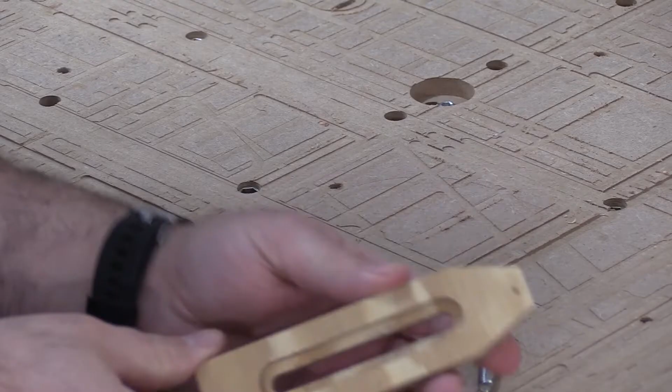So for a first project, I thought this would be good. I made a few of these early on when I got my CNC router table. I want to make a few changes to the design, so I thought this would be a perfect opportunity to do a full video. But what these are, it's just a simple hold down clamp for holding parts down onto the table when cutting, basically for holding plywood parts down primarily.

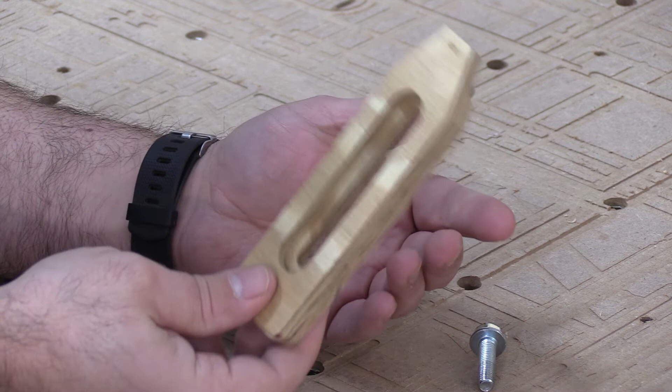It's simply made out of some 3/4 inch plywood, a slot in there that a bolt can fit in, and of course it's recessed so the head of the bolt fits down in it, makes it fairly low profile, reduces the chances of hitting that with the bit, so that hopefully you don't damage bits by hitting the bolt.

The advantage of making the part out of plywood is, of course, odds are you're gonna mess up. You're gonna put these in the path of the cutter occasionally, but since it's plywood, you shouldn't damage anything other than the part itself, and you can always make more.

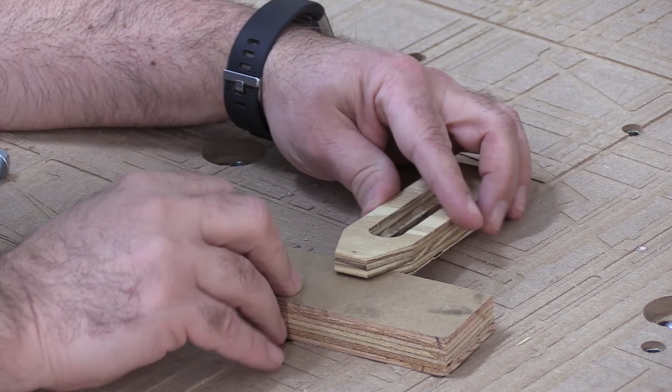So the way they work is, of course, you can bolt it down with the slot. There's a little bit of a notch underneath that can both hold down and push against the part that you're clamping down. So if we have just our stock that we're machining, the lip goes over it, and these are 8mm bolts. That's the size of the threaded inserts I have in my table. So you can get these as like 1/4 inch or 8mm. There's various sizes available.

That'll hold it so it'll keep it from coming up, of course. It does a really good job of keeping it from pushing back towards it. It doesn't do a great job, as you can see, you can pull it out from underneath. But what works well is if you have these on all 4 sides, it locks the piece in pretty well. So these are not overly complex.

However, part of the reason I chose these is because we need to do operations on both sides. We have the recess that's on this side, so obviously you need to cut with that facing upwards. But we also have this notch on the underside, so it does add the extra little trick of flipping the part over and making sure things line up. So I thought this would be a good getting started project. So let's go to the computer and I'll show you how we design this in Fusion 360.

So here we are in Fusion 360, ready to design our part. Now there's a couple things that I always like to do before I start drawing anything. So we're in a brand new untitled project. The first thing I do is I go ahead and save it. And so we'll call this hold down clamp. The reason you want to do that is once it's been saved once, Fusion 360 will auto save it from time to time. So if your computer crashes or power goes out, you don't lose everything.

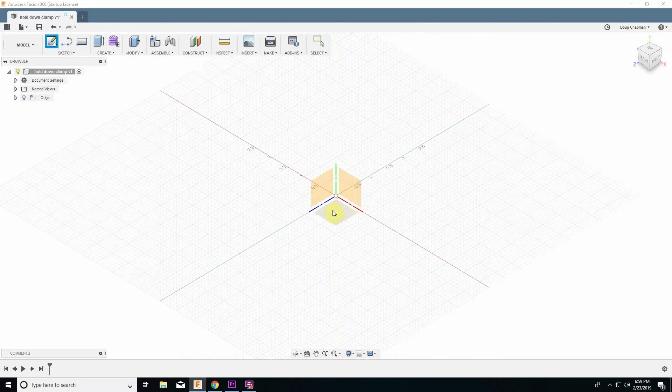And what it's asking now is what plane do we want this on. So we could have it on this plane, which is essentially the floor of this space, or on this plane, which is one wall, or this plane, another wall. It doesn't really matter at this point which one we put it on. So I'm just going to put it here on this plane, so we're looking at it from the top.

And we can start sketching here. So for the basic body, we'll just start with a simple rectangle. I'm going to do a 2-point rectangle, and just quickly make a rectangle, not even paying any attention to the size. So right now we've got just our rough rectangle.

We know we want the length to be that length parameter that we talked about, that we set in the user parameters. And for the width, let's say we want it to be 2 inches, so from here to here we want this to be 2 inches. So we need to do what's called a dimension.

I honestly don't even know where this is in the menus because it's something you use so often that I just always use the keyboard shortcut, which is D. So you press D on the keyboard, and you'll note the icon next to the mouse changed to a dimensioning symbol.

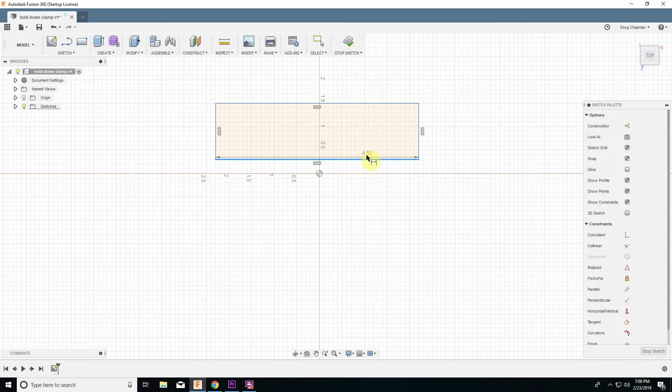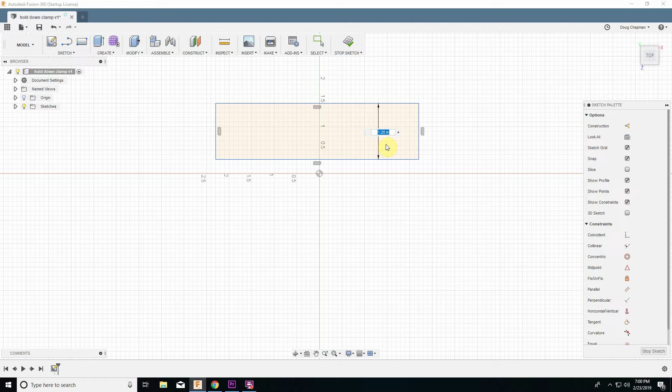And what we want is we want to set the dimension between this line and this line. So if we click on one of the lines, first it thinks we're trying to define the length of that line. But if, before we click anything else, we click on the other line, now it realizes we want to define the distance between these two. Right now it's 1.2 inches, just the random width I drew it to when I dragged the rectangle out. We want to set that to 2 inches.

Now from here to here we can do the same thing. We're still in dimension mode based on the icon next to the mouse, so let's click on this side and then this side. And on this we could just enter 6. However, we want to make use of that parameter we created so that later on, if we want to change this, we don't have to go into the diagram and change where we entered the parameter.

What we can do is actually enter that named parameter. So if we enter length here, you'll see that it sets it to 6 inches, but it's fx6, meaning it's a function, and the result of that function is 6. In this case it's a very simple function of just a single parameter, but later on we can change that parameter to update this. Now we want to round off these corners a little bit.

We don't want this to be just a simple block. Now, if you noticed in the diagram or the part I had earlier that I'd done before, I had rounded off the corners in the back and kind of created angles at the front. Now both of these things you could do after it was in 3D, once you've extruded this into a 3D part, or you can do it as part of the two-dimensional sketch.

So what I'm going to do is, to start with, I'm going to do this end of it in the 2D sketch, and we'll deal with the other end after we've extruded it to 3D, so you can see both methods. We just want some simple rounded corners here. The easiest way to do that is to just create a couple of circles.

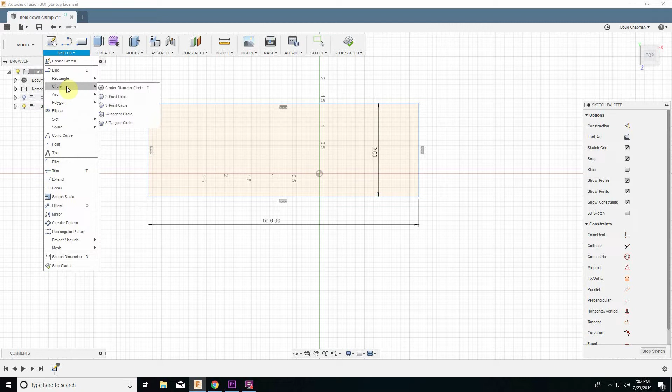So let's go up here, sketch, circle, center diameter circle. Right now I'm not going to pay too much attention to the exact size or where they are. I'm just going to draw a couple random circles. And let's say we want this curve here to be a 1/2 inch radius.

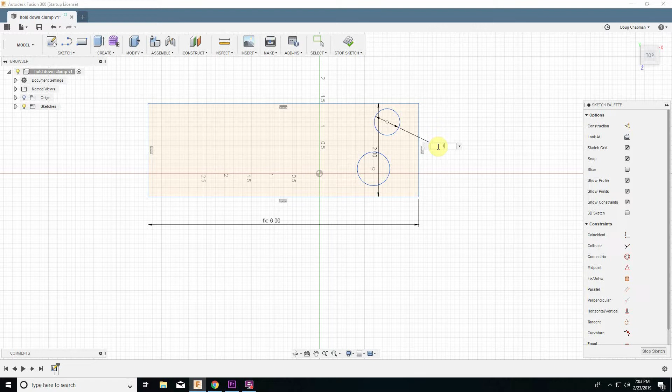So to define this circle, I'm going to go back into dimension mode by hitting D on the keyboard, clicking on this circle, and we want a 1/2 inch radius, which is a 1 inch diameter. So I'm going to enter 1 there, and I'm going to do the same thing on this one.

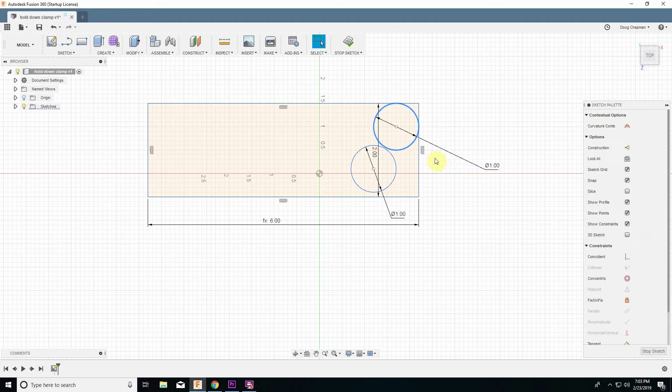So now I've got these curves the right size, but obviously not in the right location. Now you might be tempted to just select the circle and drag it to where it looks about right, and that may work, but it's not really the right way to do it. As you zoom way in here, on this one I got it pretty close, but you zoom all the way in, you see it's not actually right on that line.

It's just really close. So what we want to do is say this is exactly tangent to these two lines. Rather than just dragging, I'm going to drag this away to make it a little more obvious. The way you do that is you apply constraints.

Over here on our sketch menu, you see down here we have various constraints. First of all, let's make sure we don't have anything selected, so I hit escape. One of these constraints is a tangent constraint, so let's click on it.

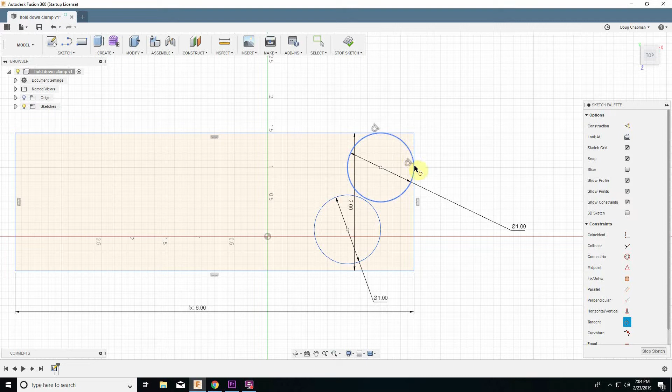Then when we click on the circle and then the line, you'll see that it added this little tangent constraint marker and lined it up so that it's touching this side. We can do the same thing up here, and now we know that this portion of the arc here is exactly the curve we want.

So let's do that on this one as well, make it tangent to both sides. And now we have our curve as we want it.

So now let's work on the slot that's going to go in the middle. We don't want the slot to go all the way to the end. We just want it to go, let's say, 3/4 of an inch from the end, from both ends. So let's say that we want to make sure the slot ends 3/4 inches short of each side. In order to do that, we really need something to line that up to.

So that is what we have, this concept of construction line. I'm going to create a line. Now I don't want an actual line, because a normal line would be part of the part. I just want a construction line, which is something you use just to help line up other features of the sketch. So in the sketch palette, we have this option called construction.

I'm going to select that, and now I'm just going to draw a line straight across here. I didn't pay any attention to how long it was, but it automatically did a perpendicular constraint here, and we'll talk more about perpendicular constraints a little bit later. This line is tied to both endpoints on these opposite sides of the part, and it is perpendicular, but it's just a random width from the end.

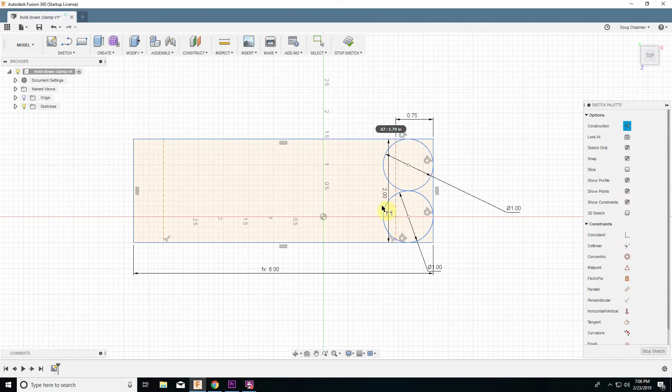Now, this is getting a little cluttered with these circles and these lines all kind of overlapping here. All we really care about for these circles is this portion of the arc that cuts off this corner. So what we can do is we can trim out some of this. And this is another one that you use often enough that it's easy to remember. The keyboard shortcut for trim is just T.

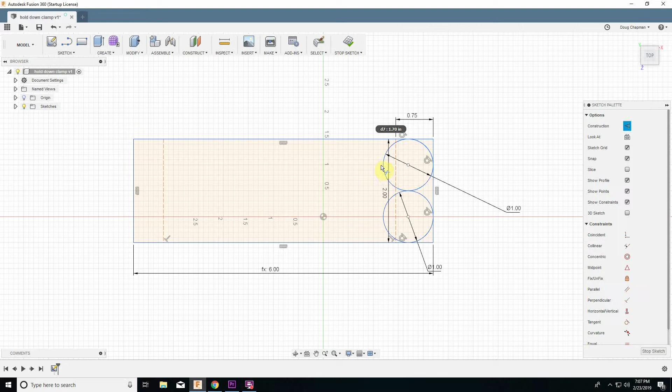Change the icon next to the mouse again. And we can click on this, and what it does is, see how it turns it red. Any place this arc intersects some other line, it assumes that's what you want to trim. So right there, it's trimming everything up until it intersects.

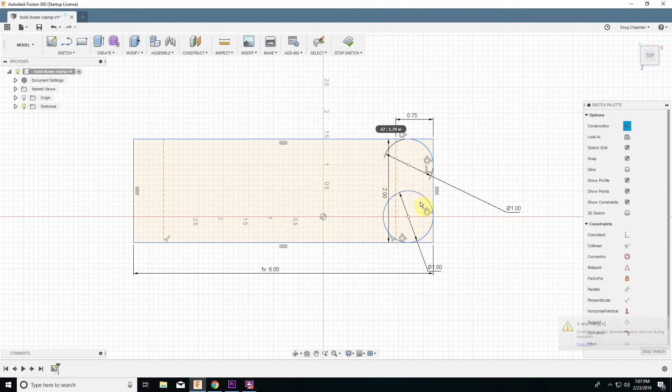So we're going to get rid of all the bits that we don't care about. Now it looks like there's more of the arc, but this is actually just part of the dimension notation, showing that this would be the diameter of an arc if there was still an arc there. But we've cleaned up a lot of that.

Now I'm going to go back into dimension mode and set this one to be 3/4 of an inch from this side. So now we know we want the slot from here to here. We also need to know exactly what is the midpoint, since we want our slot directly in the middle.

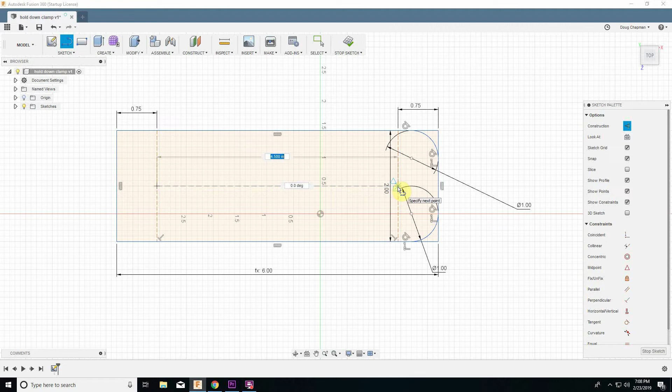So let's go into Sketch and create another line. Notice how, as I move my mouse along here, when I get to the middle, we see that triangle - that is adding a midpoint constraint. So when I click here, I'm creating a line that's tied to the midpoint of this other line, and as I go over here, I get another one when I reach this side. So I'm connecting this line directly to the midpoints of the other lines, which means I'm exactly in the middle, so we can line up our slot directly on that.

So let's actually draw the slot now. The way I'm going to do that is I'm going to create two circles and then connect them with lines. So let's go into Sketch, Circle, Center Diameter Circle.

Now we're still in construction mode, just like we did these lines in construction mode. If I draw a circle right now, you'll see it's a dotted line again, which is not actually what we want. So I'm going to Control Z to get rid of that. Let's go Sketch, Circle, Center Diameter Circle, but I'm going to uncheck this construction icon here. So now when I draw a circle, I get a normal solid line.

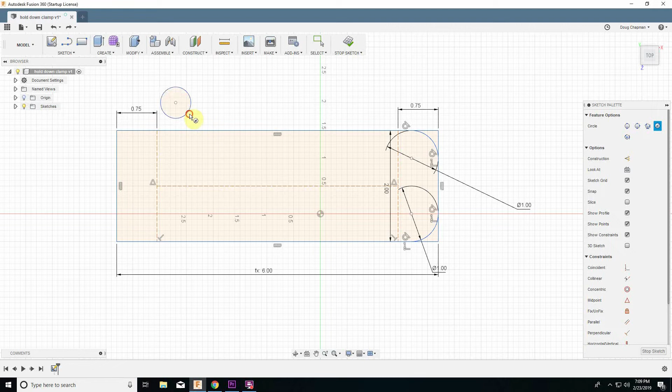And so let's just create two circles. Notice that I didn't even draw them on the part, I just drew them in a random space. We're going to line them up using constraints. So first of all, we need to set the size of these.

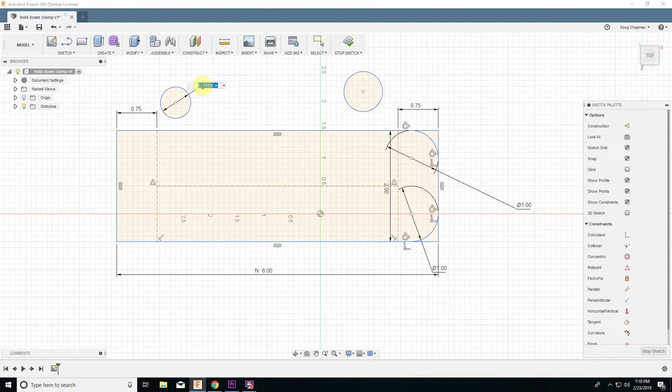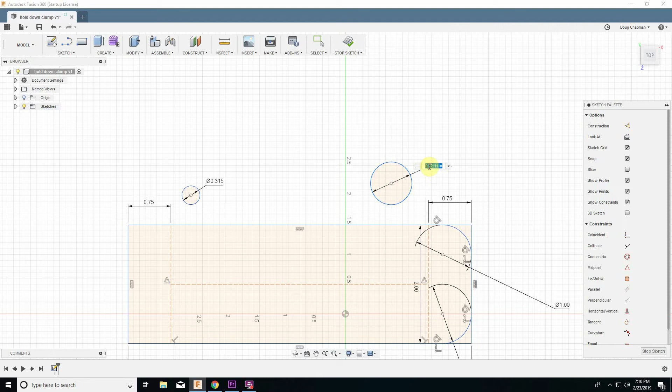So of course that's D for dimension. On my table, I use 8mm bolts for this - the rest of my diagram is all in inches, but it'll do the conversion for you. If I enter 8, it's going to give me an 8-inch circle, which is clearly not what I want. So if we double click on that again, we can change that. What we really want is 8mm. So if we do 8mm, you'll see that it did the conversion for us to 0.315. So you don't even have to worry about converting between inches and metric - you can simply specify the size and it'll do it for you.

So now let's get these aligned where we want. We need to do two separate constraints on these. We want them to be coincident with this line, meaning the center of this is along this line, and we want them to be tangent to this line, because this is where we want our slot to end.

So first of all, to make it coincident, over here in constraints, we have this coincident constraint. Click on that, now click on the center of the circle, and then on the line, and you'll see it put it right there on the line like we want. Same thing with this one.

So now, if I hit Escape, and I select one of these and try to drag it, you see it lets me drag it left and right, but not up and down. That's because we've said this has to be on this line - it's not allowed to be anyplace else. But we haven't set any constraints about where on the line.

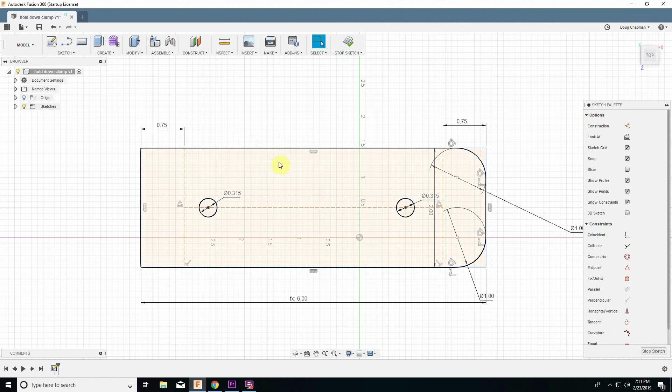So now, just like we did earlier, we go tangent between the circle and the line, and same thing over here. So now we have the endpoints of our slot right where we want them.

So now let's connect these two circles. So let's sketch a line. And once again, I'm going to draw it completely off the part, and we'll use constraints to line it up. So now notice how since I didn't end this intersecting with any line, it thinks I want to continue. By default, it tries to do a multi-segment line.

But if I come down here to this little check mark, that means I'm done with that line, and you don't want to do any additional segments. We'll do the same thing over here. You can also hit Escape. So on this one, I'll just hit Escape, and it did the same thing.

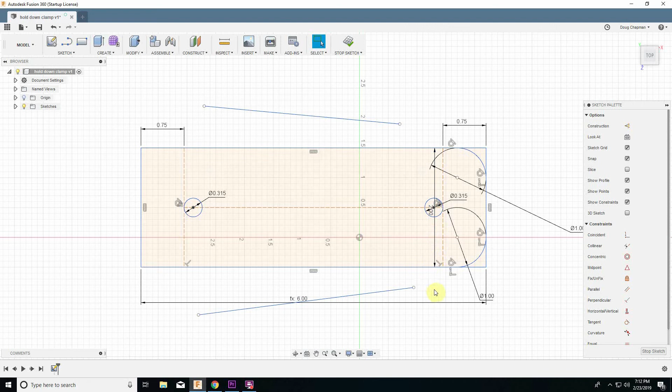So now we want these lines to be just touching these circles. So, of course, we've got our tangent constraint. So if we do that and say tangent to there, notice how it's not quite what you would think. You'd say, well, that's not a tangent. It actually is, because if you were to extend this line out infinitely, it would be touching this circle.

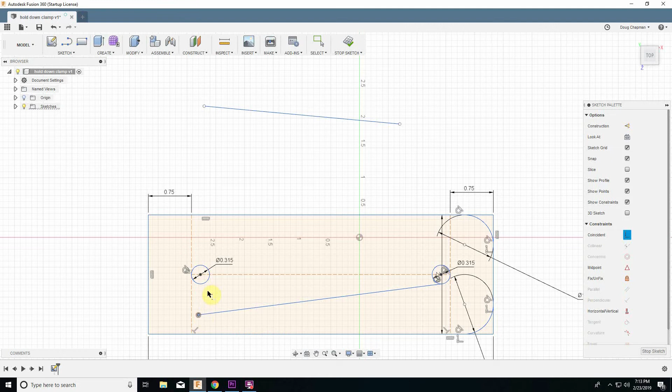So where it is in space, the angle it is pointing would go right by it, but of course we want it touching, and touching means we need the coincident constraint. So we'll also do that, the endpoint and the circle, and that end of the line is where we want. We also want this end to be coincident here, and notice how that's still not quite where we want it. It's because we also need that to be tangent.

So now we have a line connecting these two that's going to be the side of our slot, and we'll do the same thing with this line. Our tangent constraints, and we'll add our coincident constraints. And there is our slot.

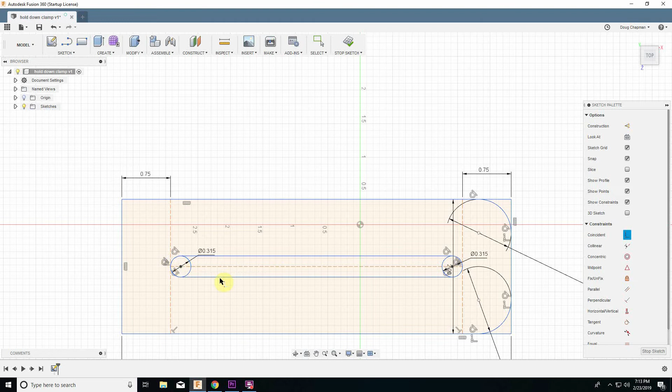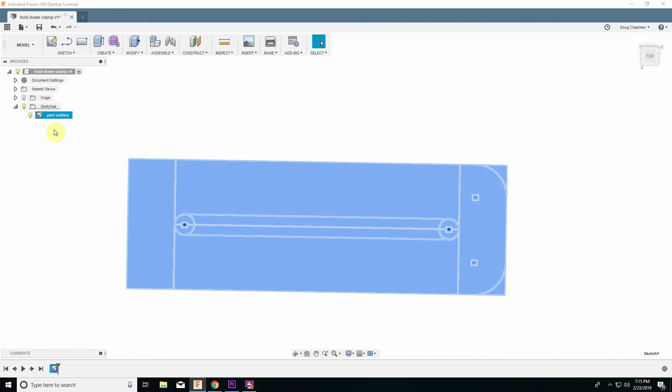Okay, so for now, that's all we want on this sketch. So let's do a stop sketch. And you see here under sketches, we have this new sketch called Sketch 1. I like to rename my sketches. So if you click on it and rename it, we can call this the part outline, for lack of a better name. Once you have several sketches, it's handy to have the names so when you need to go back and edit them, it makes it a little bit easier.

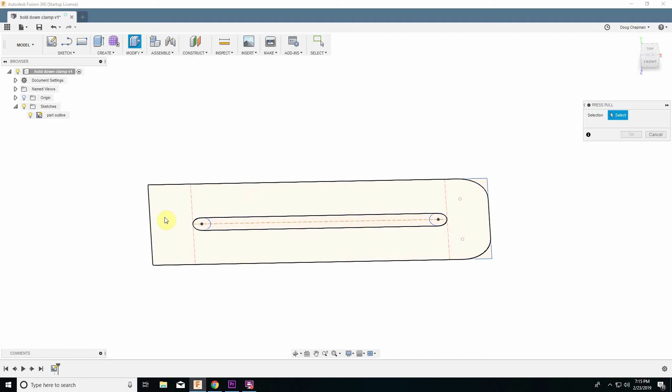So we have a two-dimensional sketch. We want to turn this into a full three-dimensional part. So to do that, we go Modify, Press Pull, and we select the face that we want to extrude. So just selecting this anywhere inside here, notice how that filled in all the areas that are bounded by the solid lines, but just ignored the dotted lines, because the dotted lines are just construction lines.

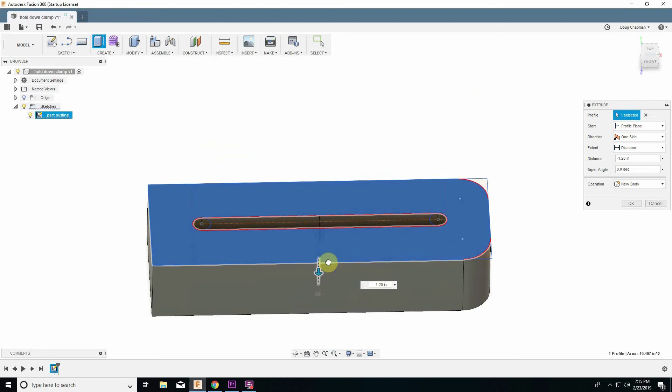Now we have this arrow. We could pull it up, pull it back down if we wanted to go the other direction, and to a random length. Or we could type in a value. But what we really want to do here is this is going to be the thickness of the plywood. So we want to make use of that named parameter ply, and that will set the thickness to that 0.75 plywood. So when we decide we're going to cut this out of a slightly thinner piece of plywood, we can change that and it'll change how much that extrusion was pulled out.

So now we have the basic rough shape of the part. So earlier I mentioned when we did these rounded corners, we did that as part of the sketch, but we also could have done that by modifying the 3D part. So on this end, I'm actually going to do something similar to what we did here, but in 3D.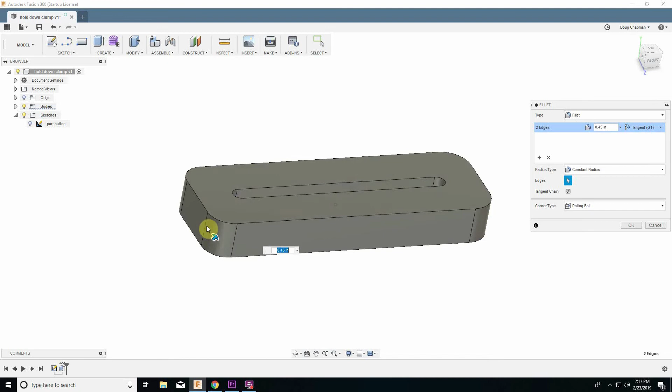So in 3D, what we want to do is create a fillet, which is just a rounded corner. So if we go Modify, Fillet, now it's going to ask us what edges we want to create the fillet on. So we select this edge and this edge, and it's similar to the press pull. We get these arrows. We could push it in manually and pull it out manually. But what I want to do on this one is just make this a rounded corner. We know that this is 2 inches apart, so if we create a radius of 1 inch, you'll see that we get a nice rounded nose on it.

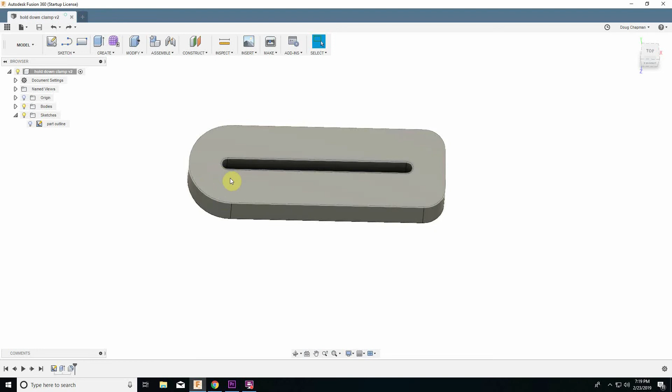So we're going to just enter that, hit return, and we have the rounded end of it. Okay, so now let's work on the countersunk area that we wanted to do around here. We wanted to be able to recess the head of the bolt down into the part a little bit. So in order to do that, we need to create another sketch to show the outline of that countersunk area.

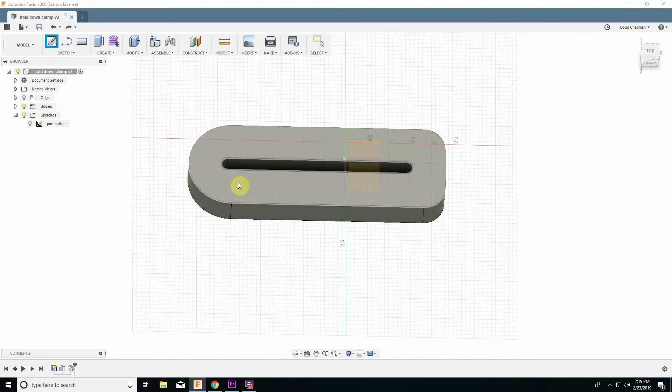So to do that, we need to create a new sketch, create sketch, and we're going to draw this sketch on the plane of the top of the part here. So we'll select that face. And now if we hide the body here, you can see that there's nothing on this sketch yet. So we need to actually transfer some of the dimensions of what we already have onto this sketch.

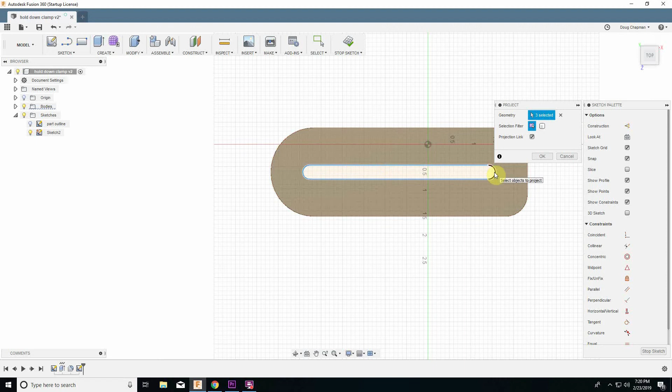So if we hit P for project, we can select a few things we want to make sure show up in the sketch. We want to make sure this whole slot shows up. So I'm going to select this arc, these two ends, and this arc. Click OK, and now if we hide the three-dimensional body, you can see that we have those parts. As I hover over it, it shows the outline of the body, but as far as what's actually on the sketch, it's just that inner part there, that inner slot.

So what we want to do is we want to create essentially another slot just on top of that. So we're going to do a couple different circles. It's going to be very similar to what we did before. On this one, I want this to be large enough so I can get a socket onto the bolt, and I've measured that out to be 0.7 inches. So we'll D for dimension, 0.7 on each of these.

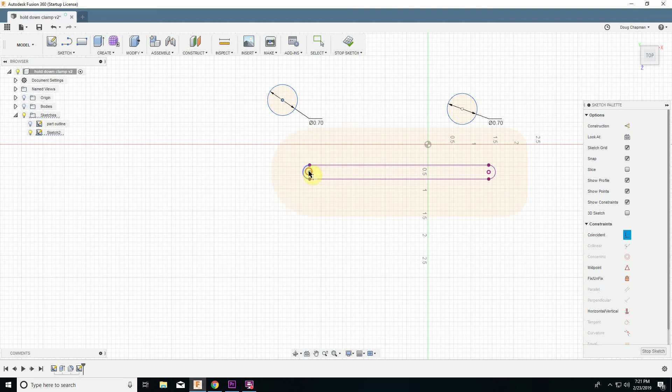Now, I want these circles to be directly on top of the center of this arc. So if we do coincident, click on the center of this and the center of this, that'll line that one up, and the same thing for this one. And the rest of it is just like we did earlier. We're going to create a couple lines. We're going to make them coincident with the circles. And we're going to make them tangent to the circle.

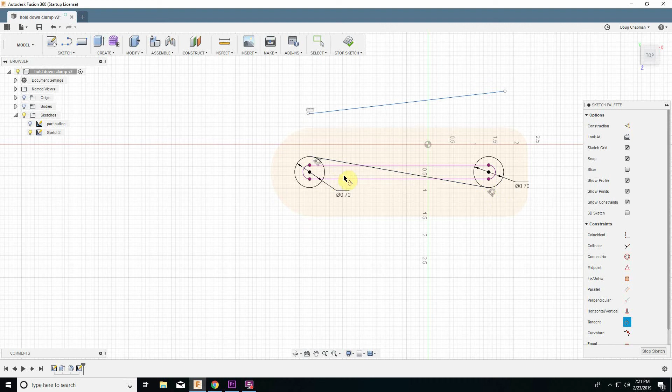Now this happens sometimes. It tries to guess exactly where you want it. There's a couple different possibilities here, because that is still tangent to both of them, but that's clearly not what we want. So if we hit escape, zoom in here, click on this tangency, delete that constraint. Now we can grab onto this, and we still have the coincident constraint, so we've got to be somewhere on it. And it's going to snap in. When we create the constraint, it's going to do whatever is closest to where it is now.

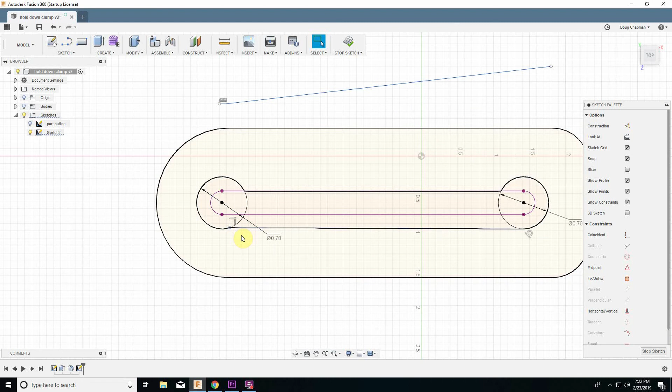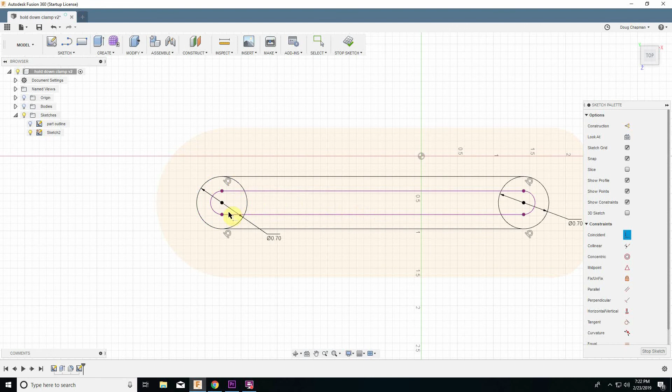So now, if we hit escape, go tangent between that and that, that's what we wanted. And I'm going to do the same thing on this other line. And there we have the outline of the slot that we want, so we can stop sketch. Show the three-dimensional body again, and now what we want to do is another press pull, just like we did when we did the extrude. If we do press pull and push down into the part, it'll cut that out.

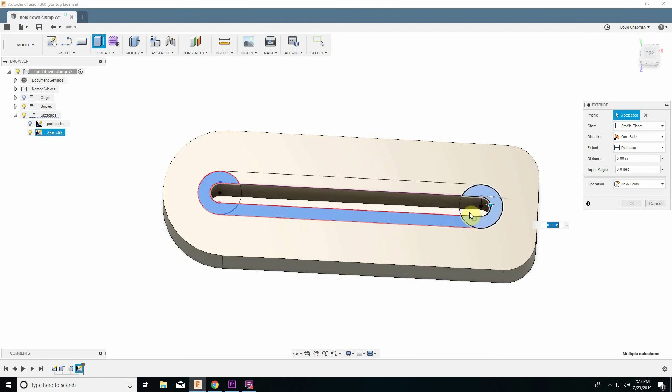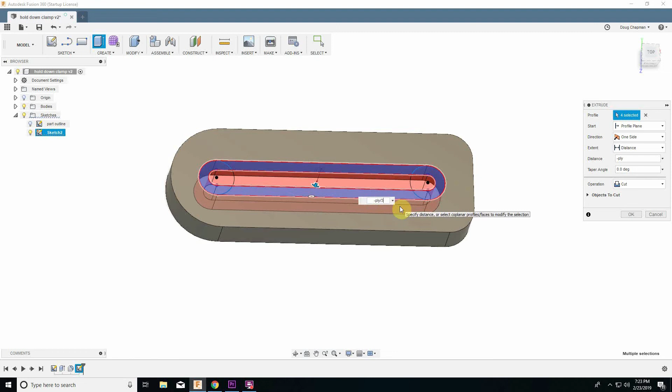Now, since there's all these partial segments there that I didn't trim out, we need to select multiple faces, but the same thing applies. So what we want to do is we want to go down into it. Now we could do something like -0.5 to go half of an inch in. And you see that that is cutting down into it half of an inch. What I want to do though is I want to go 1/3 of the thickness of the part into it. So our thickness is ply. So if we do negative ply divided by 3, we can do a formula like that. And you'll see that that cut our recess in 1/3 of the way in.

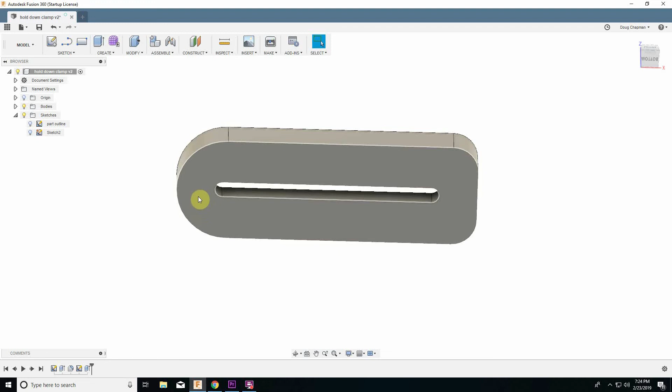So now we're nearly done. The last thing we need to do is on the bottom here, we wanted to create a little bit of a notch, a little lip for it to sit down over what it's clamping on. To do that, we need to draw a sketch that gives us a line across here that we can push down in. So once again, we want to create a new sketch right here. We want to project a little bit of geometry.

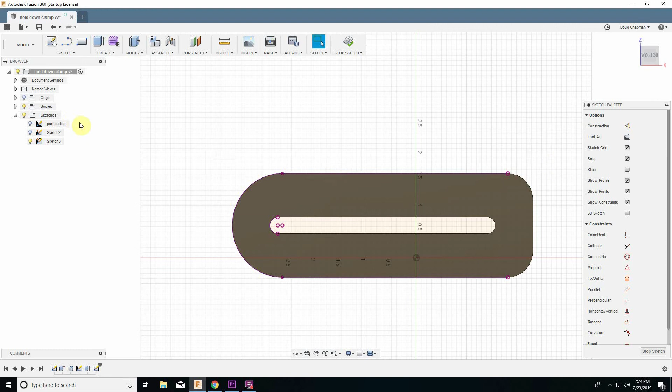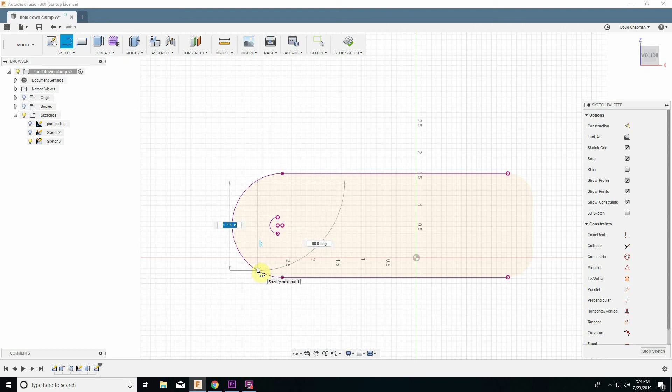We want that curve on there, and let's do that edge, that curve, and that edge as well. That should give us enough to see what we need. Turn off the three-dimensional body, and so now we need a line, and on this one I'm going to just let it create the coincident constraint right there. Also, right there, it's going parallel. You know what? I'm actually going to purposefully make it not parallel and do it kind of at an angle there, because I want to make sure the constraint is what I define.

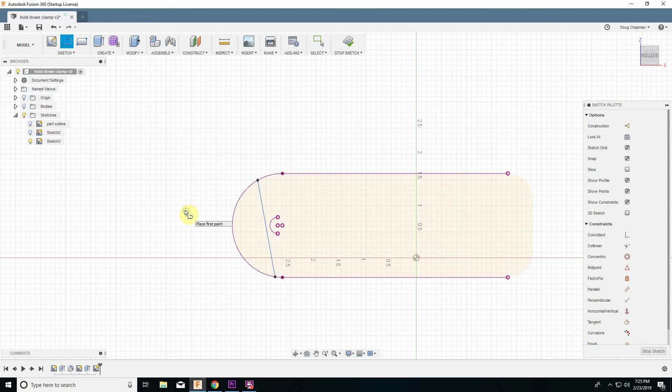Sometimes the automatic constraints that it chooses are not quite what you want, and it gets a little confusing. The automatic constraints are great. It speeds things up, but sometimes it causes a little more confusion than it's worth. So now we need this line to go straight across, meaning this line needs to be perpendicular to this line. So we have a perpendicular constraint. We can click on this line and what we want it perpendicular to, and that lines up straight across there.

Now we can still move it. We can move it anywhere along here. It's going to stay perpendicular. It's going to stay touching here. But we haven't defined where we want it. Now you could just drag it and drop it where you think you want it, but you're still better off actually defining exactly where you want this. And what I want to do is about 3/4 of an inch from the end, or sorry, about 1/2 an inch from the end.

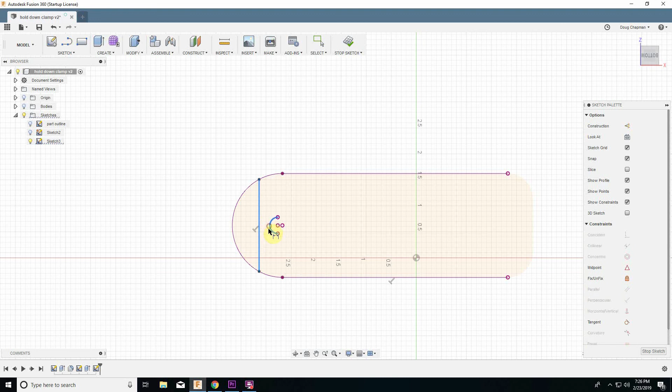Earlier we defined this as being 3/4 of an inch from the front of this, but we can't really define anything based on this. If we go dimension and click on this and then click on this arc, notice how that is doing a distance from the center of the arc to the line, which isn't what we want. We want from the end of the arc.

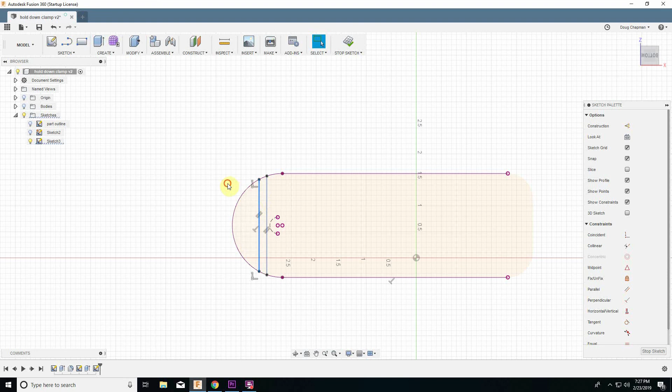So let's create another construction line. Turn on the construction. We want to go across here. Oh, somehow I changed my wrong line to be construction. I'm not sure how I managed that, but that's a useful thing. I meant for this new one to be construction, and somehow I accidentally changed this one. Easy to do. You use this a lot, and it's another useful keyboard shortcut. So if we select this line and press X, that toggles between construction and normal line. So that one is now a normal line. I'm going to click on this one and press X, and it's a construction line.

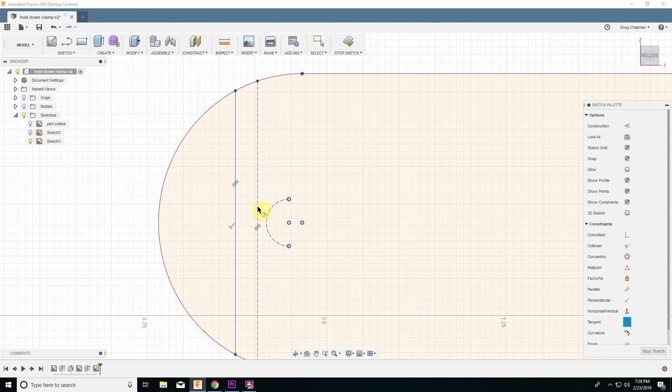So what I want is this line, actually back out. We want to go not coincident, tangent. Tangent's what we want, between this and this. So now we have something we can dimension from. I can hit D, and dimension from this line to this line. I want that to be 1/4 inch, because I know that this is 3/4 of an inch from here. That gives me a 1/2 inch lip. So now we have this semicircle portion defined here that we can use to cut our little notch.

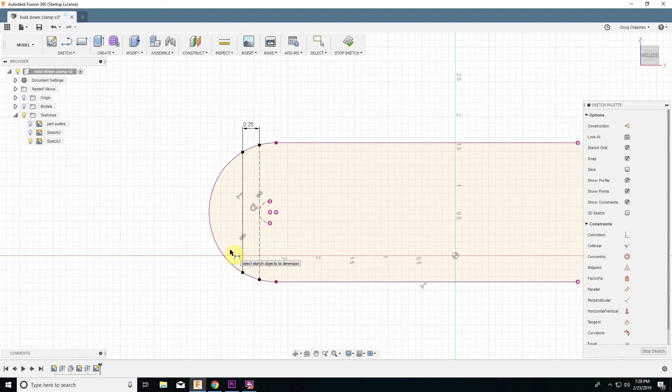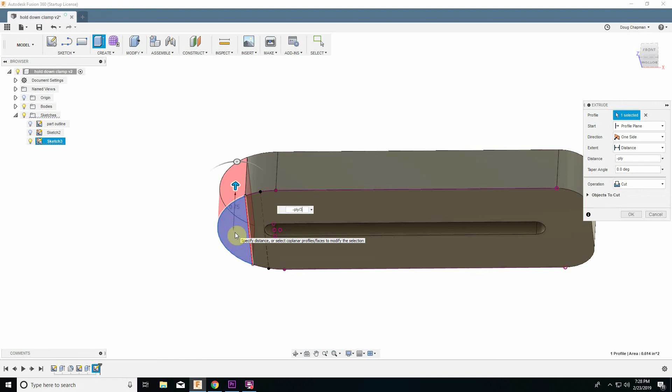So we can stop sketch, turn on the view of the 3D body again, and what I'm going to do is modify, press pull. I'm going to do this the same way I did to cut that recess in the top. We're going to select what we want and go negative ply divided by 3, so we go 1/3 of the way into it again. And that is our part. We've got our recess, we've got our little notch, and everything is parameterized.

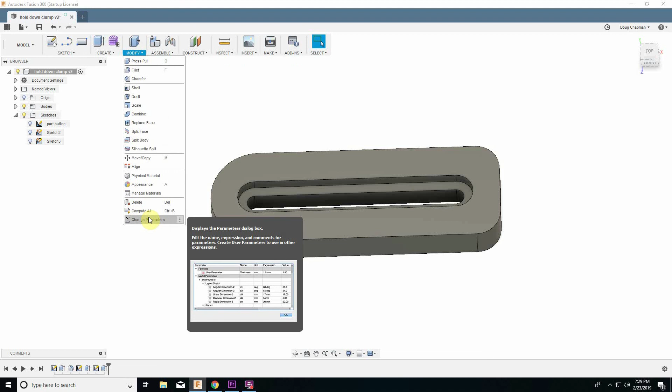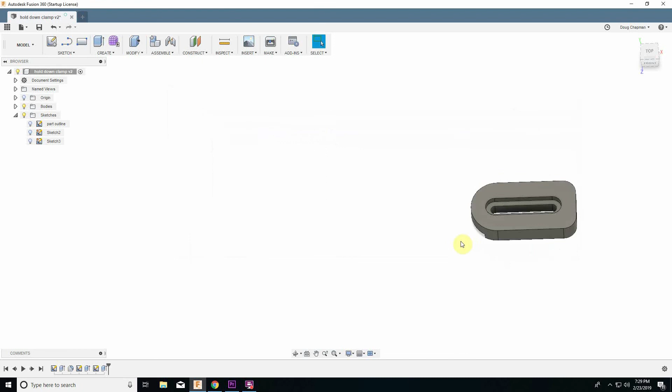So just to demonstrate those parameters, now that we've got the full thing drawn out, let's say we want one twice as long. Well, let's make one 12 inches long. So we go change parameters, and we change this length to 12 inches. And you see we have a much longer one. And if we want a shorter one, same thing. Say we want just a 4-inch part. Allows us to quickly and easily change that, and we can change the thickness for the plywood, and we don't have to redraw anything. As long as you've used that parameter properly, it will resize things.

So next thing from this is we will actually do the CAM to generate the toolpaths, and that will be in part 2 of the video series.